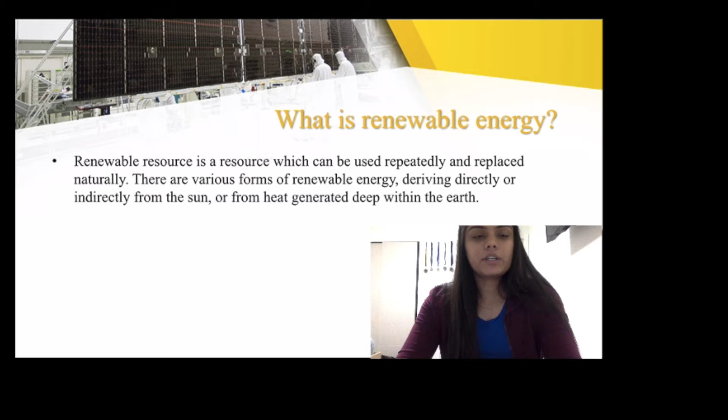I will be discussing some major resources of renewable energy and looking into two major issues of hydroelectric power and fuel cells. To start, the definition of renewable energy is a resource which can be used repeatedly and replaced naturally. Renewable energy almost never runs out, and we can see examples of this through solar energy, oxygen, fresh water, biomass, and many other sources.

There is another alternative source of energy known as non-renewable energy. The difference between renewable and non-renewable energy is that a renewable energy source can be replenished easily, because they're derived from natural sources such as the sun and the wind.

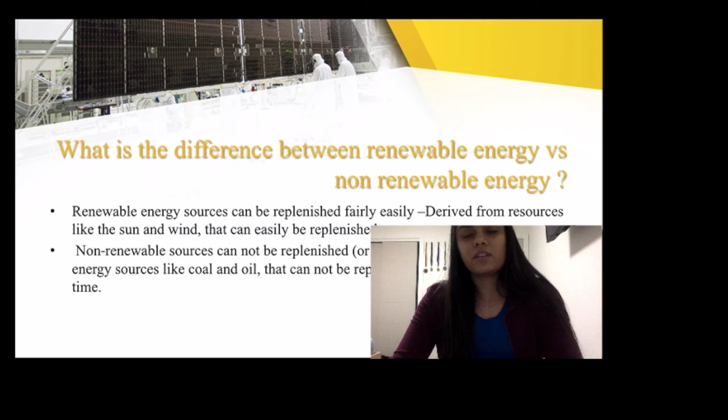Some of the major examples of renewable energy sources are solar power, wind power, hydropower, geothermal, and biomass.

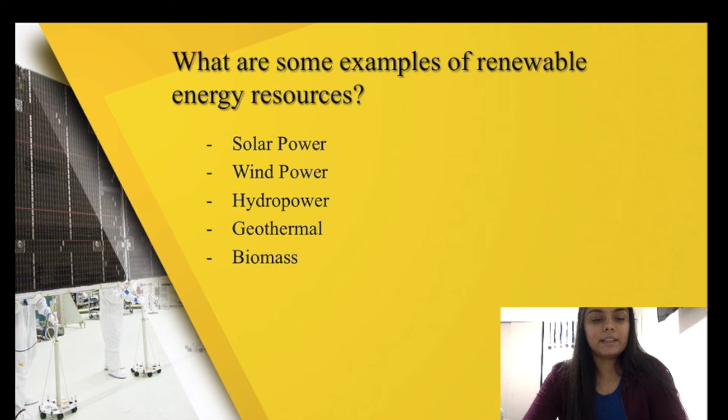Solar energy is a renewable energy source as it uses the sun's radiation to reach the earth. The energy is converted into other forms of energy such as heat and electricity. The sun is a major source as it's constantly producing fuel. It produces thermal energy through a process known as nuclear fusion, where hydrogen and helium atoms are constantly slamming together, and hydrogen atoms form helium. This process has been going on for millions of years.

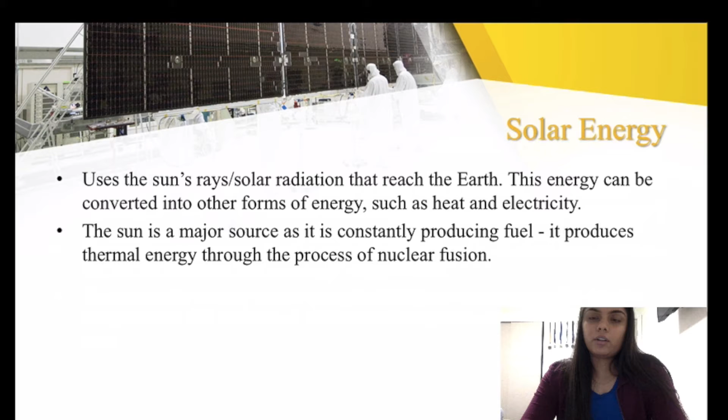We can see an example of solar energy through solar power towers. Another source is wind power. Winds are caused by the uneven heating of the atmosphere by the sun, as well as irregularities of Earth's surface and the rotation of the Earth.

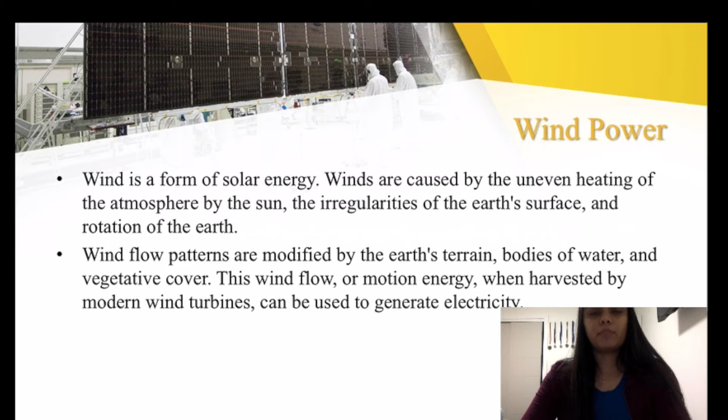Moving on to hydropower, also known as hydroelectricity. It definitely relies on fast-moving water, most likely in large rivers and oceans. It converts energy from flowing water into electricity. It's considered a renewable energy source because the water cycle is constantly being renewed by the sun. It mainly relies on fast-moving water going from a higher point, converting the force of that water into electricity as the generator's turbine spins.

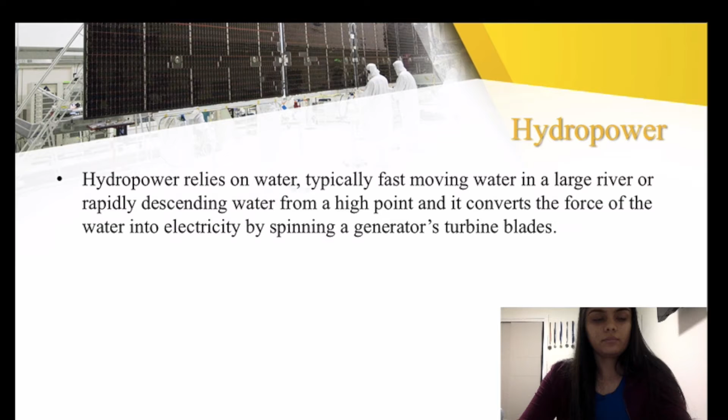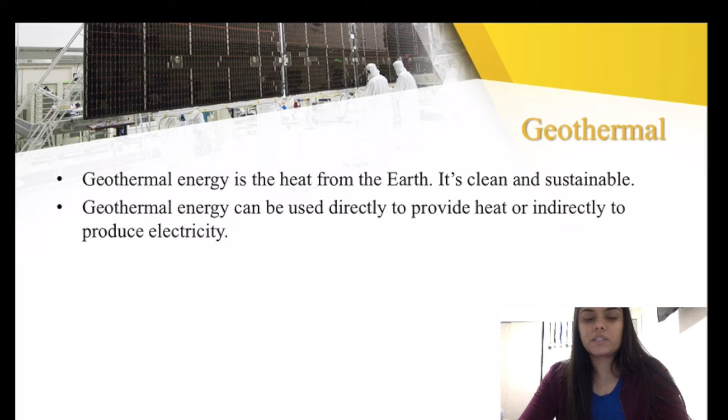Geothermal energy is heat from the earth. It's clean and sustainable, and geothermal energy can be used directly to provide heat, and sometimes indirectly to produce electricity. We can see geothermal energy on smaller scales, like heat pumps and systems in buildings and our homes.

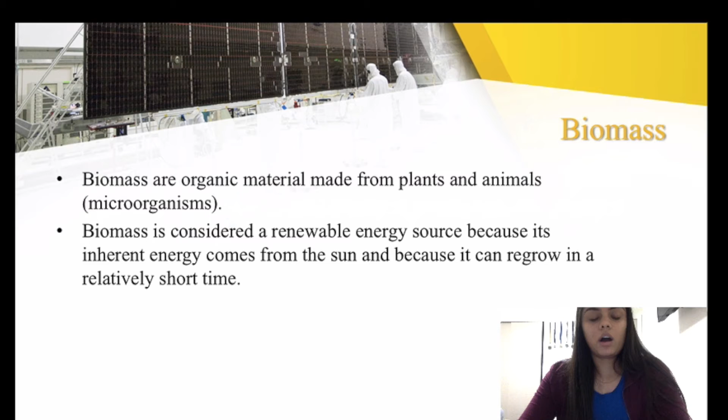Biomass is also another renewable energy source, as its organic materials come straight from the sun, and it can be used to regrow a lot of things in a very short period of time. So it's very organic and natural.

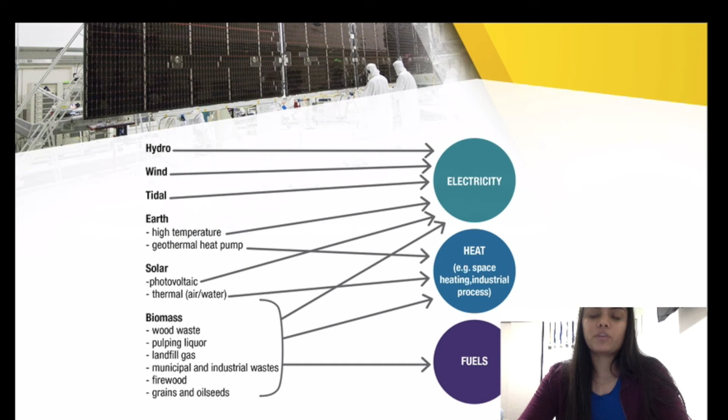This figure shows how renewable energy sources, from many of its types, are an incredible way to power, heat, and fuel our country. We can see how each type of renewable energy source, whether hydro, solar, or biomass, all contributes in different ways towards electricity, heat, and fuels.

Renewable energy definitely has its pros and cons. It does not produce any greenhouse gases through solar, wind power, or geothermal energy. There's definitely high production of electricity through hydropower, and a very limited negative effect on the environment through solar energy. There are downfalls too, because wind power normally requires large, extensive land use.

They can also harm bats and migrating birds through those turbines. Solar energy components like power towers are definitely an expensive investment to install. And there is a small amount of damage to the environment through hydropower, because when we build dams, it can change water regularity, its chemistry, and its temperature, which can cause harm to fish and other aquatic species.

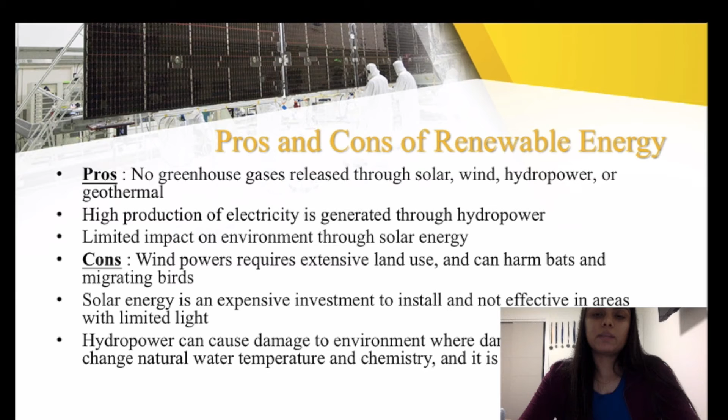One of the issues I'll be talking about is hydroelectric power. The purpose of it is to produce electricity from generators driven by turbines that convert the potential energy of falling or fast-flowing water into mechanical energy.

Hydroelectric power plants are usually located in dams and rivers. It raises the water level behind the dam and creates as high a head as feasible. In some areas powerhouses are constructed, and in others hydroelectric power plants are built so people can take advantage of the rise and fall of the tides.

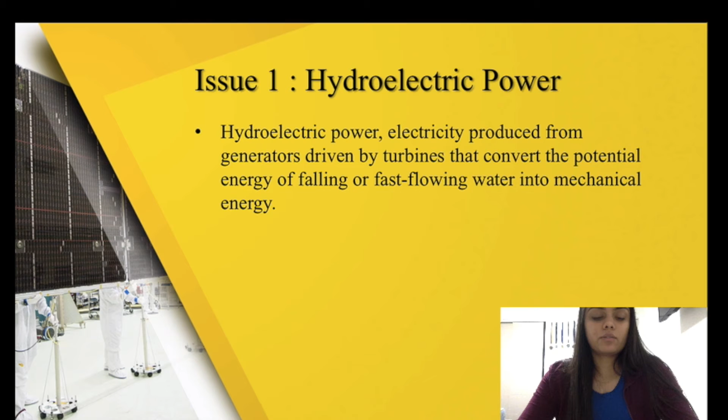Hydro plants normally produce electricity using turbines and generators, where mechanical energy is created as water spins rotors on a turbine. This figure shows the different components, and how the turbine is connected to the electromagnetic generator, which produces electricity when the turbine spins.

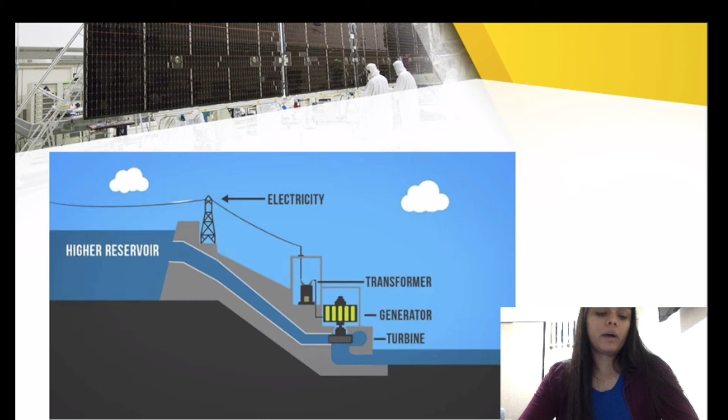The two main components of electricity production are dams and rivers. Dams normally utilize the potential energy from dam waters to produce electricity. Run-of-river systems normally use turbines and generators too, but rely on natural water flow.

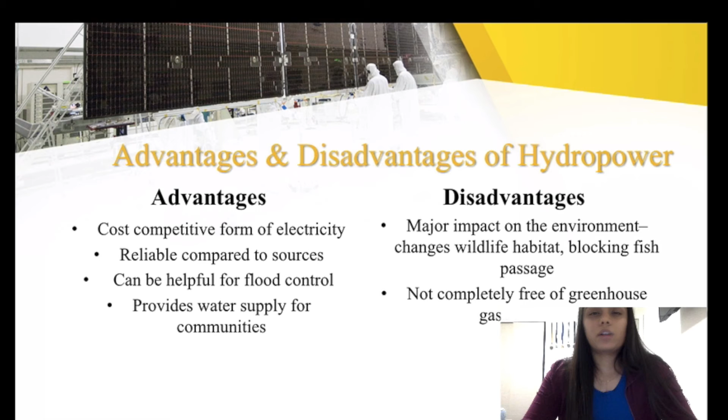There are definitely advantages and disadvantages of hydropower. They're normally a cost-competitive form of electricity and a very reliable source compared to any other source, and they're very helpful for flood control and provide a water supply as well. There are a few disadvantages though, such as harm to aquatic life and changes in wildlife habitat, and they're not completely free of greenhouse gas emissions either.

The next topic is hydrogen and fuel cells. Hydrogen is definitely a large source of fuel for our future. It's a combustible gas that can react with oxygen and give off energy, with the only product remaining being water. It's a very clean source of energy, and as a gas it yields lots of energy per gram compared to other fossil fuels.

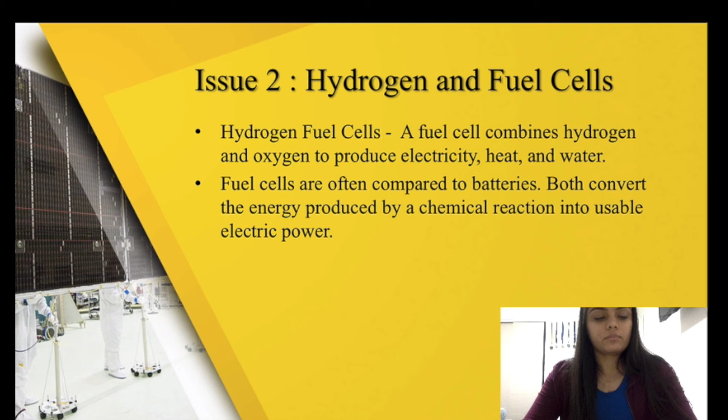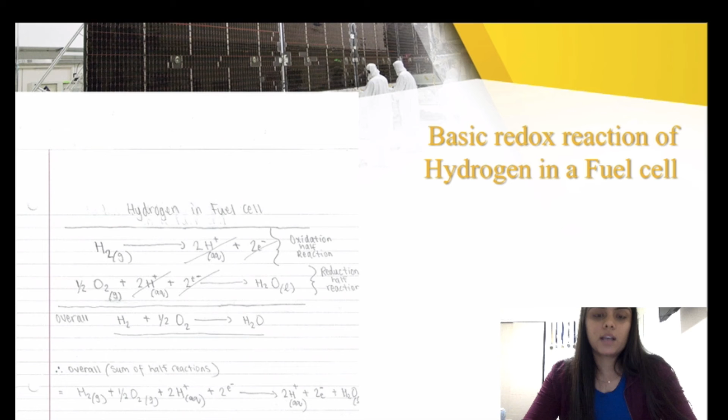This is basically a redox reaction of hydrogen in a fuel cell, and we can see the breakdown of hydrogen through the oxidation half reaction, with the end product remaining just water. In a fuel cell, hydrogen is able to give up its electrons by forming hydrogen plus and two electrons as a result.

The purpose of fuel cells is to convert chemicals such as hydrogen and oxygen into water in order to produce electricity. A great example of this can be seen through a battery, which is an electrochemical device that converts the chemicals stored inside into electricity. The thing about batteries is they eventually run out, or die.

What we do is either recharge it or throw it away. But fuel cells are a little different — they constantly allow chemical flow into the cell, so it never goes dead. As long as there is a flow of chemicals into the cell, electricity flows out of the cell as well. A hydrogen fuel cell is an electrochemical cell that uses spontaneous redox reactions to produce current that can do work.

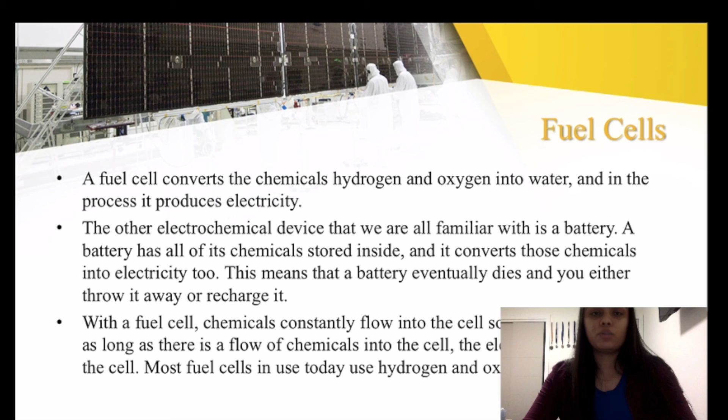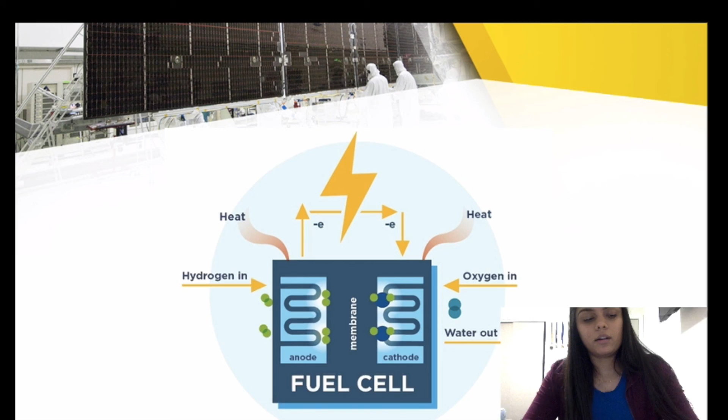This is a fuel cell, and it shows how the whole process takes place. The hydrogen flows to a platinum catalyst connected to the anode. Molecular hydrogen is dissociated into atomic hydrogen on the metal surface, and the atomic hydrogen is oxidized this way. The protons travel through the solid electrolyte, and molecular oxygen is reduced at the cathode side, combining with the protons to form water.

There is definitely a problem with hydrogen and fuel cells as a source of hydrogen. It's a problem because the quantity of hydrogen in the atmosphere is very low, which can be very crucial as well.

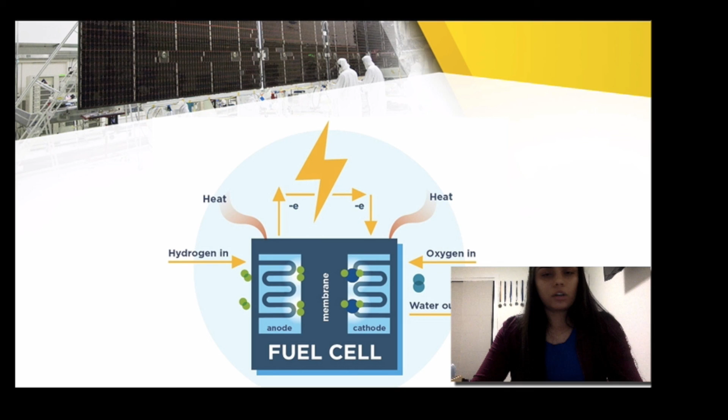Just looking at renewable energy as an overall energy source, there is definitely a higher upfront cost. While we can rely on it to save money using these sources, it's going to cost us more for the technologies that need to be built. There are other problems like geographic limitations and storage capability as well. But at the end of the day, there are definitely more positive aspects than negative ones, and renewable energy is going to promote a cleaner, more natural, and more sustainable environment for sure.